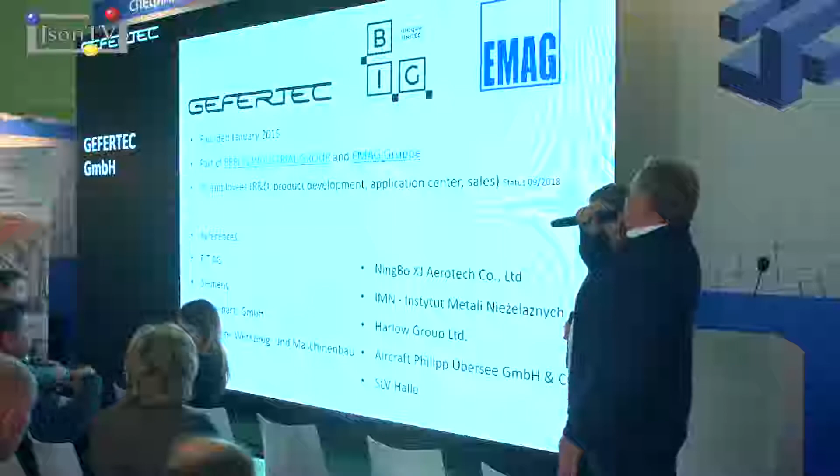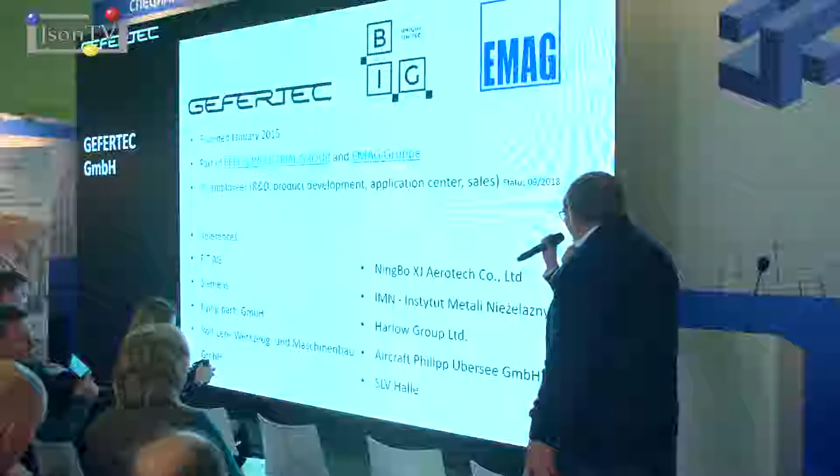Down here you will find some of our clients. It's kind of a widespread target group that we are focusing on. So we are focusing on job shops, aerospace industry, tool makers, institutes, all kinds of different industries.

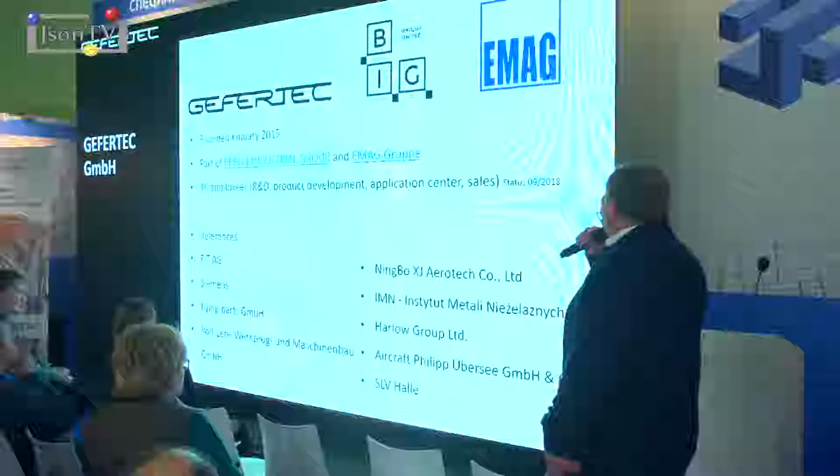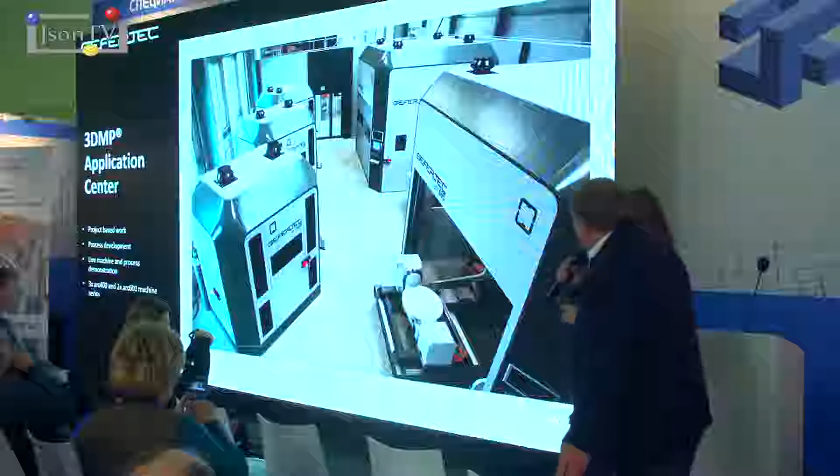Yeah, and here you see our two machine types. We have a small one and a big one, and you will see three small machine, 3 ARC 400 machine type, and 2 ARC 600 machine types.

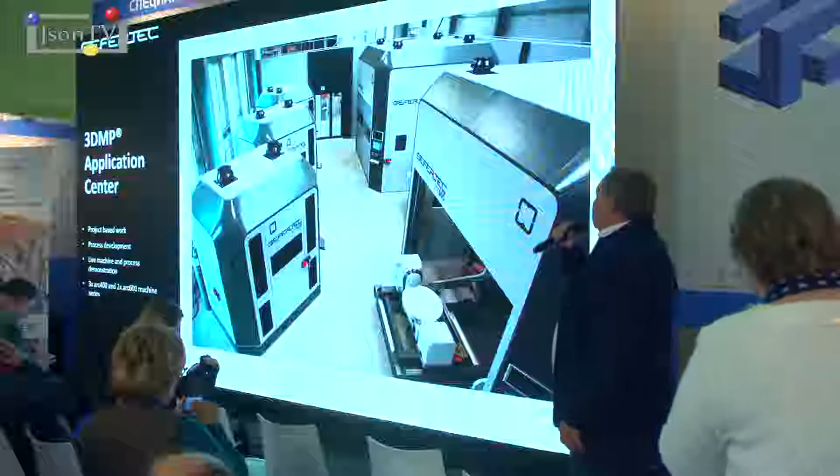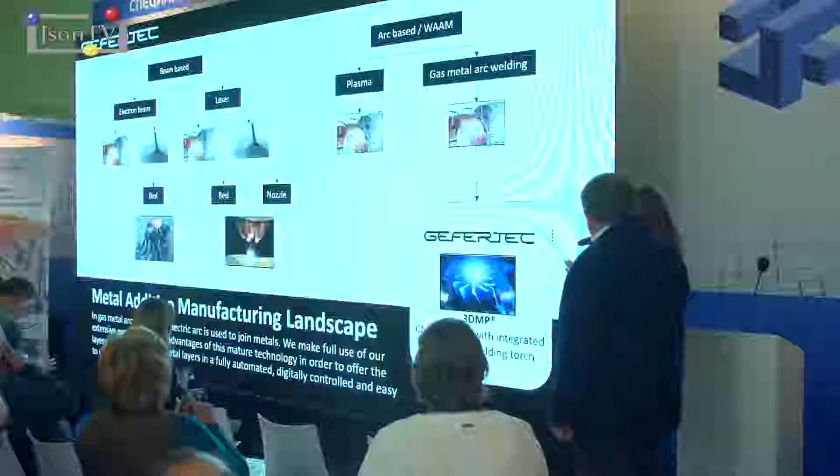All right, and now I will come to the technology itself. So you have seen the machine, and now we are talking about what is happening in this machine. Just to give you an idea, this is a landscape of metal additive manufacturing, and we are located here at the WAAM process. So we are using the WAAM process, which means it's a wire arc additive manufacturing technology.

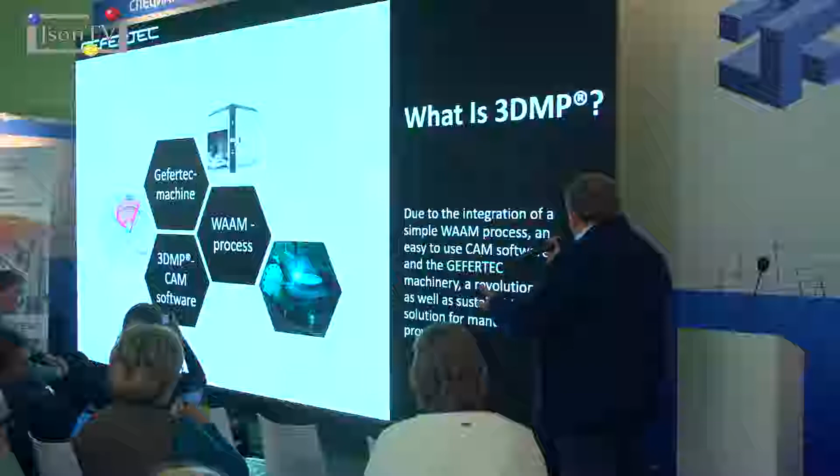But our technology is more than the WAAM process, so we call our technology 3DMP, 3D metal print, and it integrates the WAAM process with the market-ready machine and market-ready CAM software. So the CAM software is our own development, and all those three components, the machine, the process, and the CAM software, that is what 3DMP stands for. It's a package, right? It's an industrial-ready solution.

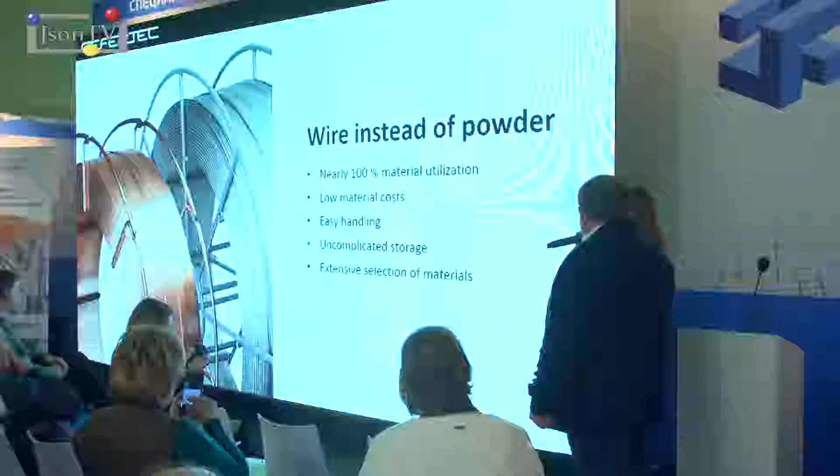And as a basis material, we are using wire, not powder, because it's also cheaper than powder. It's easier to handle. It's easier to store. We are using 100% of the wire, so there's no recycling needed as we have it for the powder technologies. And it's already a market there for this wire, so we are using standard welding wires for our process.

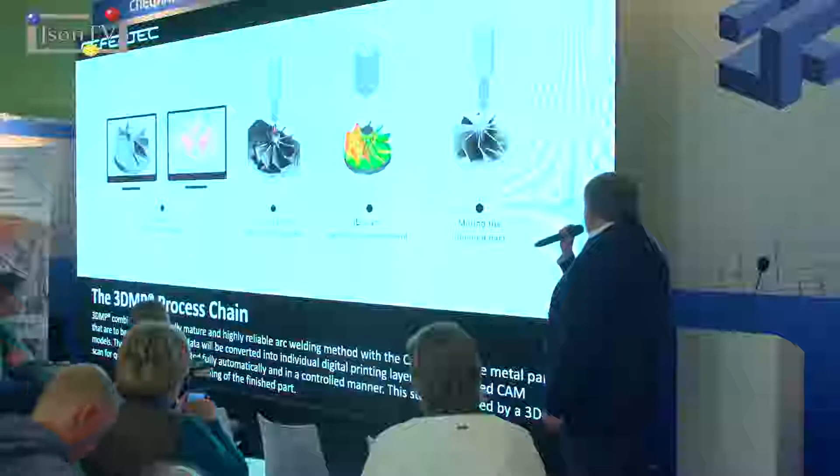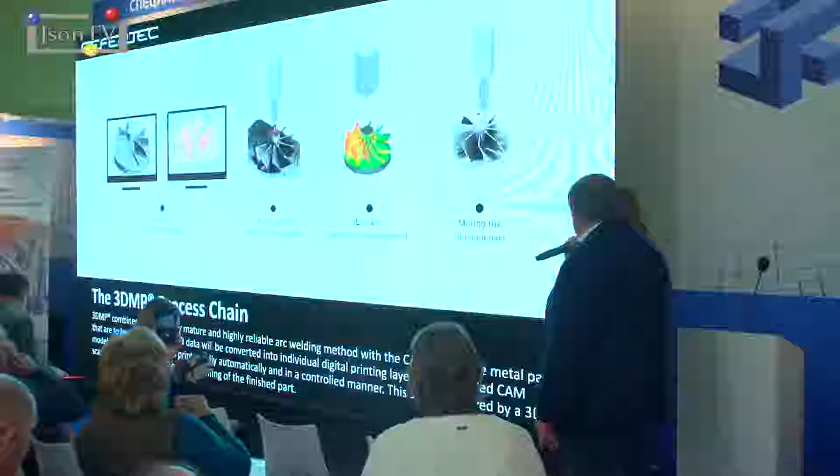Now we're having a look at the process chain of our technology. It looks similar to all other additive manufacturing process chains. So we are starting with a CAD file with a step model of a part. We simplify that, put that simplified model into our CAM software, where the slicing is done, creating the tool paths and getting the NC code out of the CAM software.

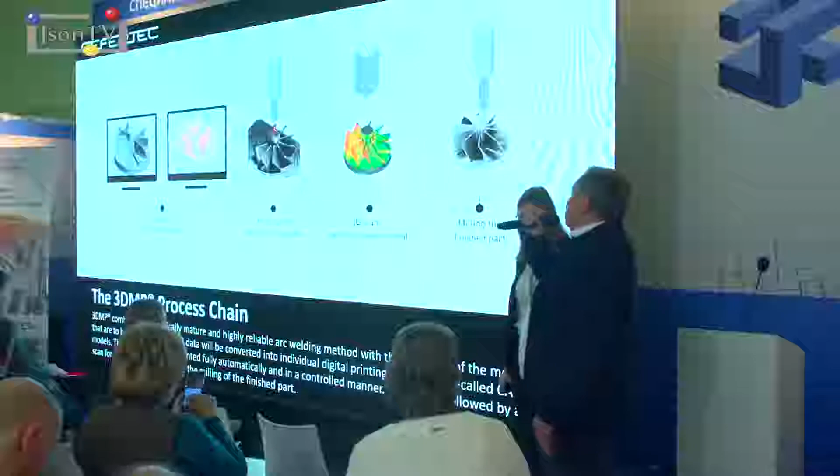Then we take that NC code and put it to the machine, and then we place the substrate plate into the machine and start the printing. The part is printed layer by layer, and then we have the near net shape part coming out of the machine.

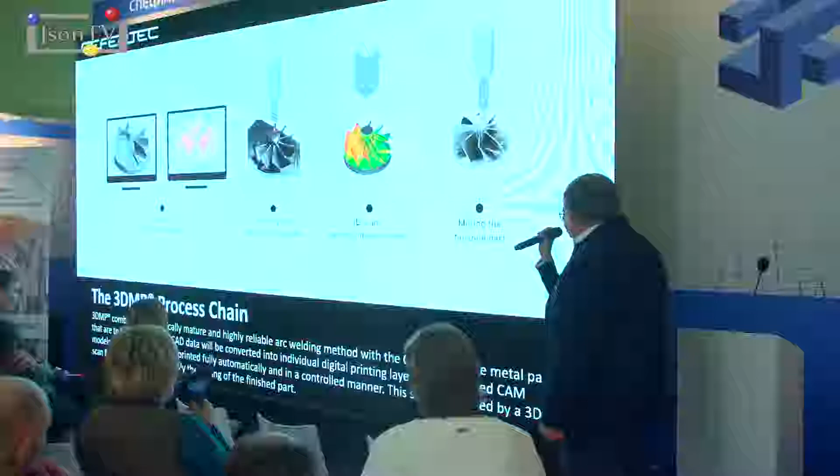After the printing, we are scanning the part because you can see that it's a quite rough surface, so a finishing is needed afterwards. That's why we have to print with an offset, and with the scan we are checking if the offset is alright, so if there's enough material to finish the part.

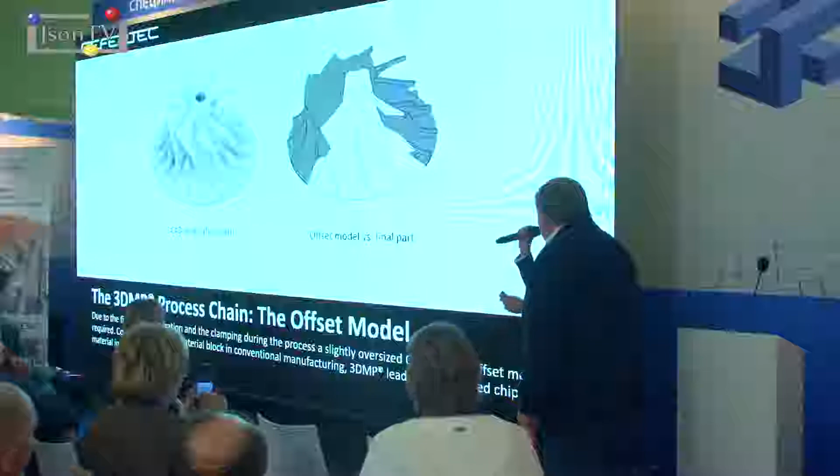Now we will go through this process chain and illustrate it with this impeller here. As I said, we are starting with the CAD model, the final part. We put an offset to this CAD model, as you can see here, generally 1 to 3 millimeters offset that we put onto the final part.

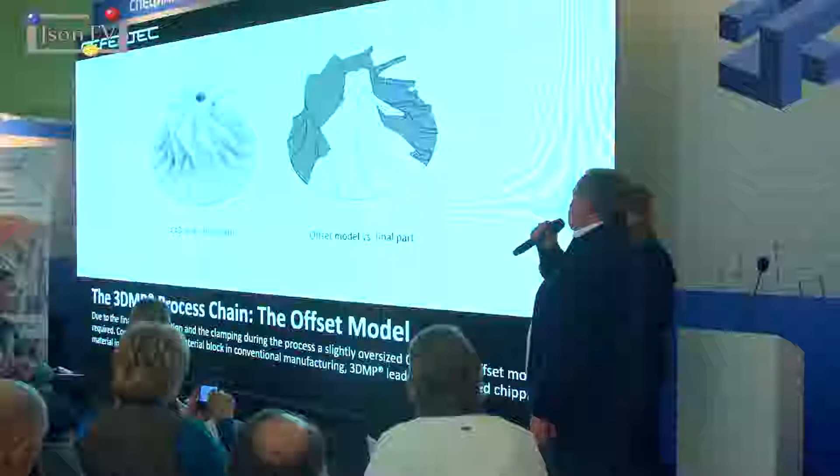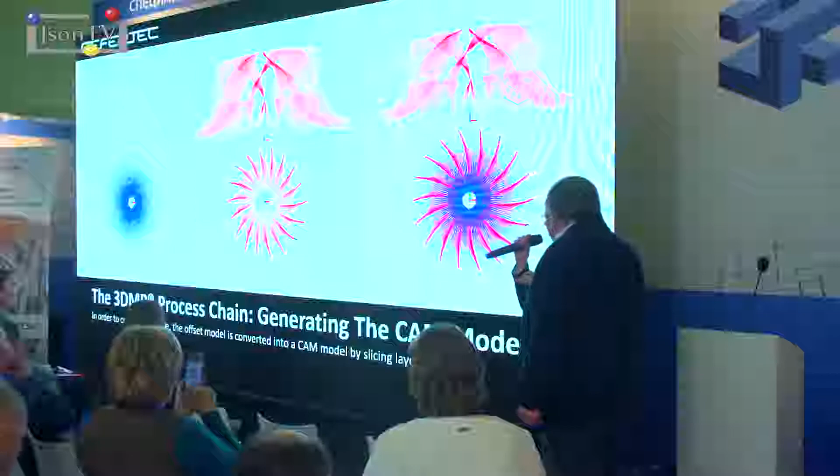And we put this offset model to our CAM software, and I think this explains it quite well that we are always separating the part into different geometries. So with this impeller, we start with the cone and slice the cone, because this is done. This will be printed 3-axis wise, and after that, we are having a look at the blades and slice the blades, because they will be printed 5-axis wise. And then we put those two paths together and get the NC code for this program, for this impeller.

3-axis or 5-axis? The cone is 3-axis. And the impeller itself is 5-axis.

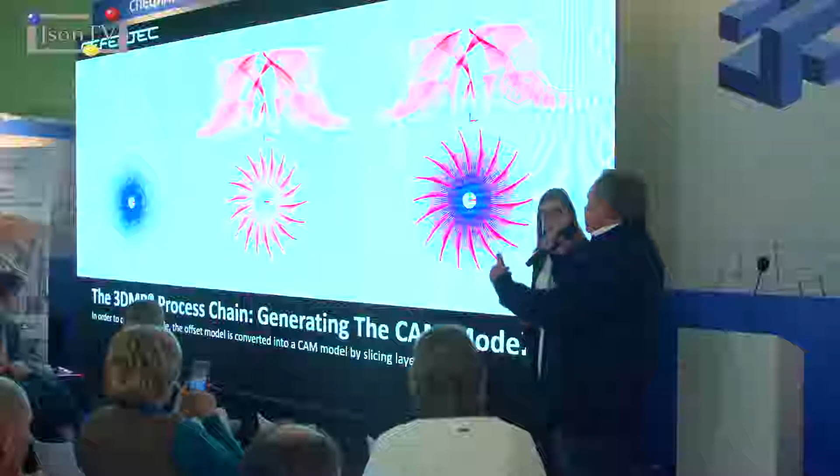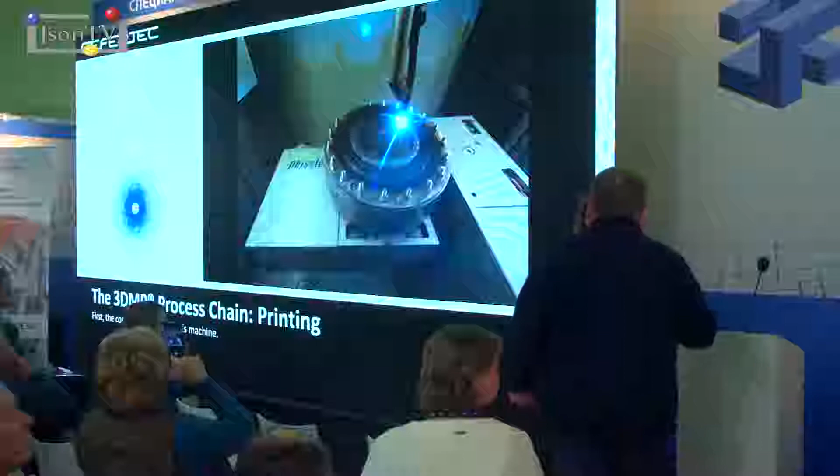Okay, and now we will start the printing. Can you start? It's a video. Where is the video?

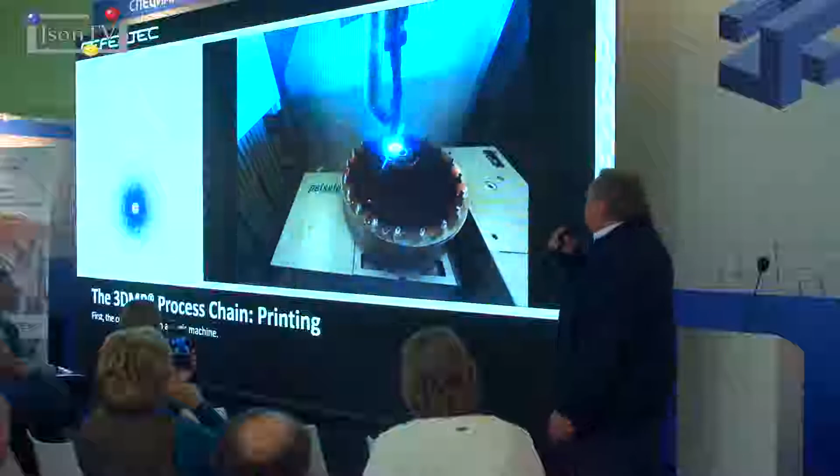So this is first we start with the cone, 3-axis wise. The diameter of this impeller is 400 millimeters, and the height is 250.

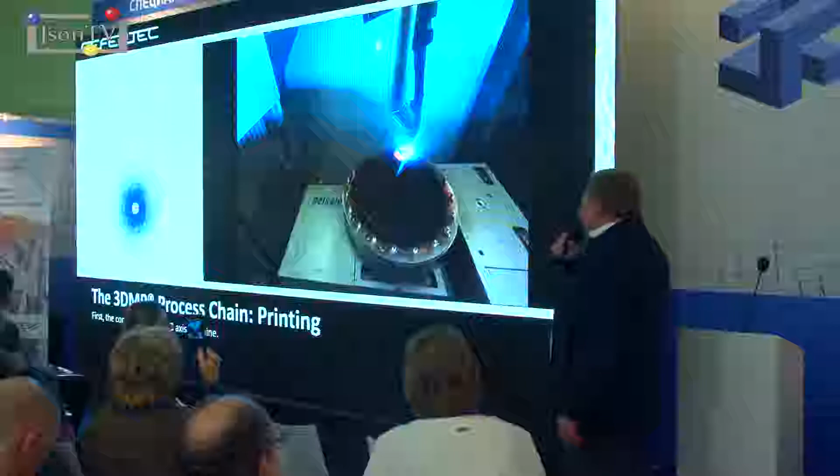And now we are printing the blades onto the cone 5-axis simultaneously. And this is, we are capable of that thanks to our CAM software.

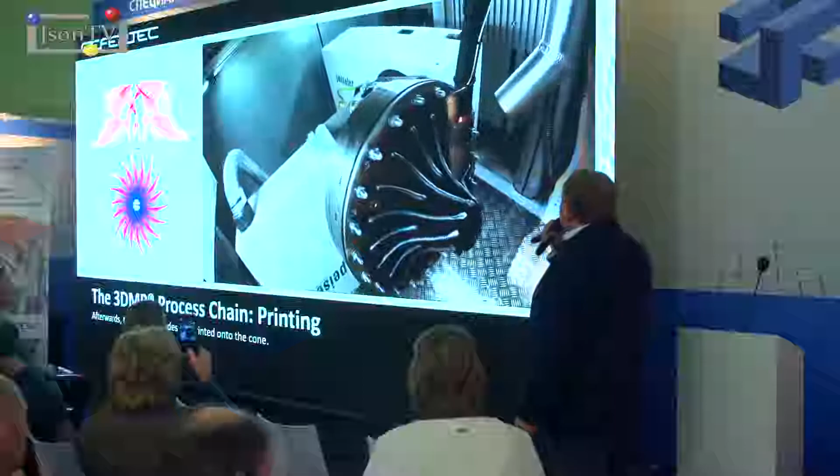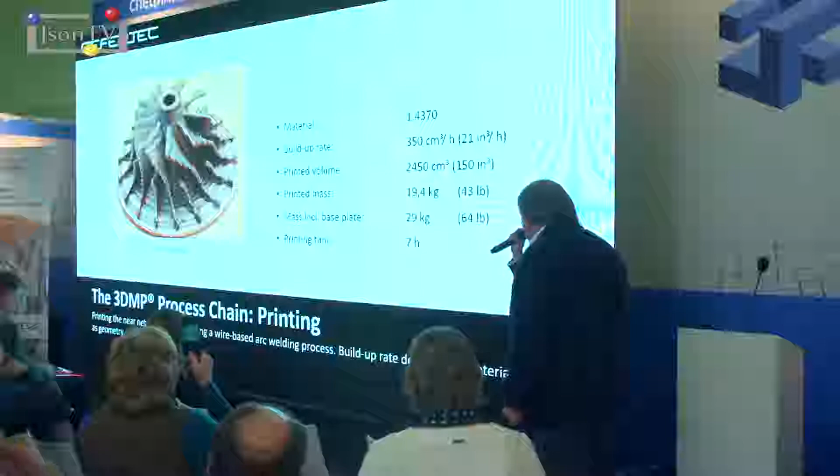Okay, and then we have this beautiful printed impeller. The printing mass is around 20 kilograms of stainless steel, and we were printing that one in 7 hours. But we also have to measure the interpass temperature of the layers, which we do with a pyrometer. When it gets too hot, we have to stop and cool it with pressured air.

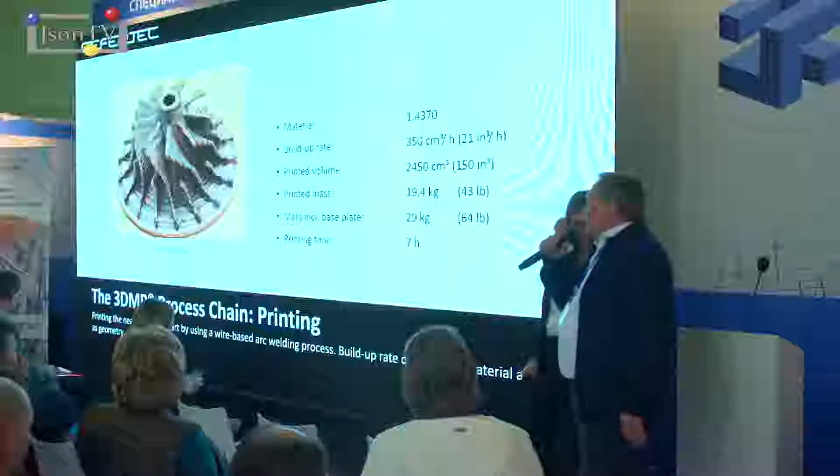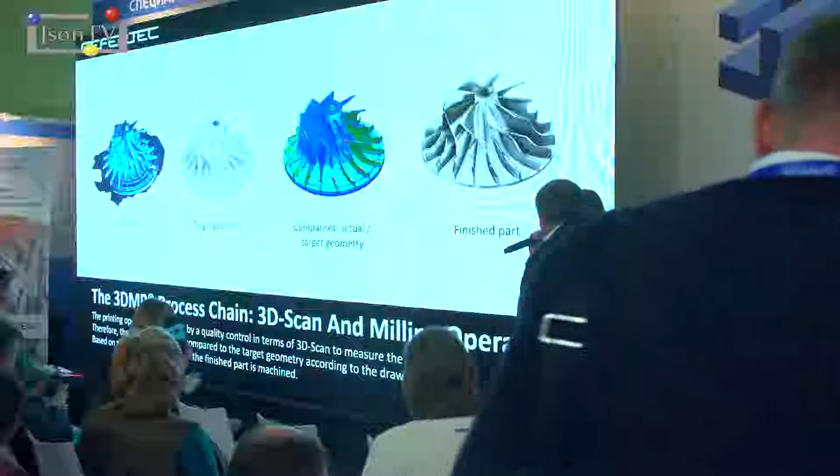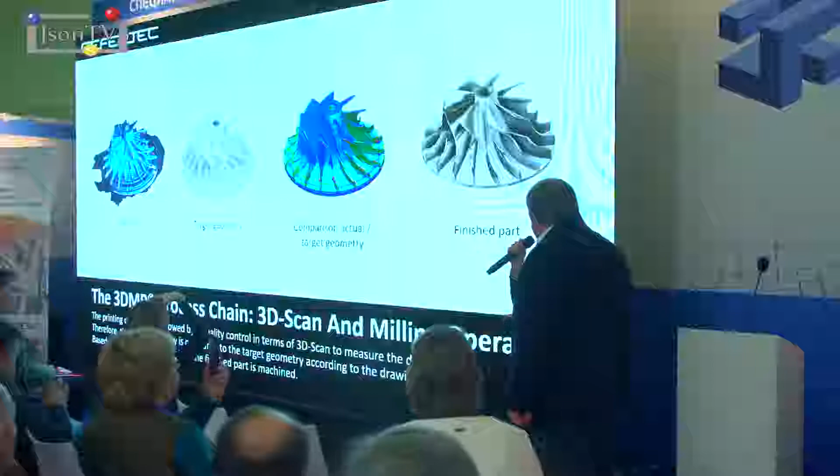Okay, after the printing, we are scanning the part and see if the offset is alright. This is an example of a worn-out impeller, comparing the actual geometry to the target geometry. Those red spots show where we need more material. This is an example of how you can repair worn-out parts; you don't always have to start from the base plate. Red spots stand for places where material is not enough, so you can return the part back to the process.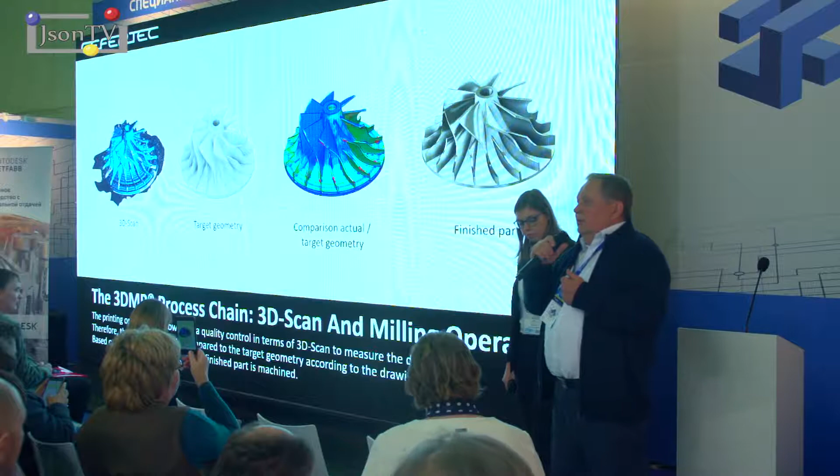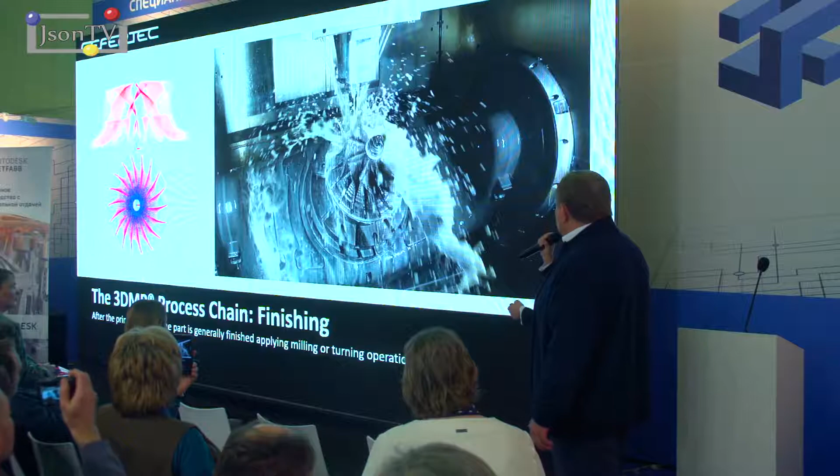Okay, and after we checked if the offset is alright, we give that to partners and the part will be milled and finished. This is a half-finished impeller just for demonstration. On the previous slide was shown the process of milling, and so this is what the finished product looks like when all the work on this item has been completed.

All right, so this was our process chain. Now this shows quite good what we want — to which technologies we have competition. We don't compete with those powder-based technologies; those are totally other applications, totally other parts that they can do. We want to fight against conventional manufacturing, so we can shorten the whole process that is needed in advance of producing the part, with our 3DMP technology.

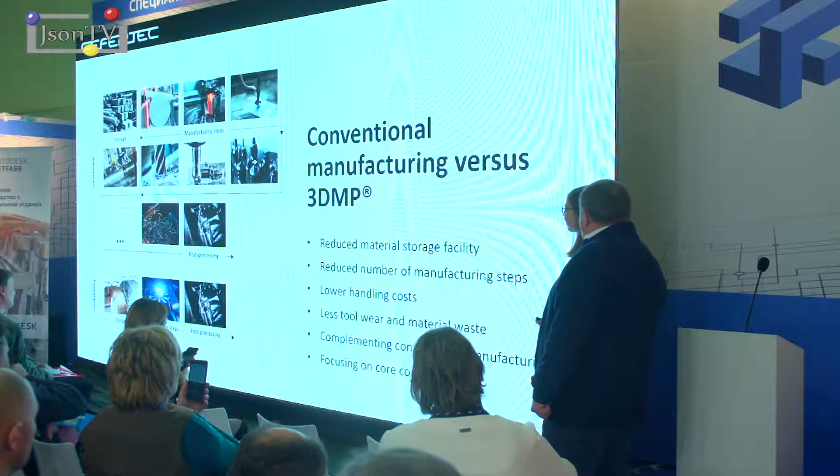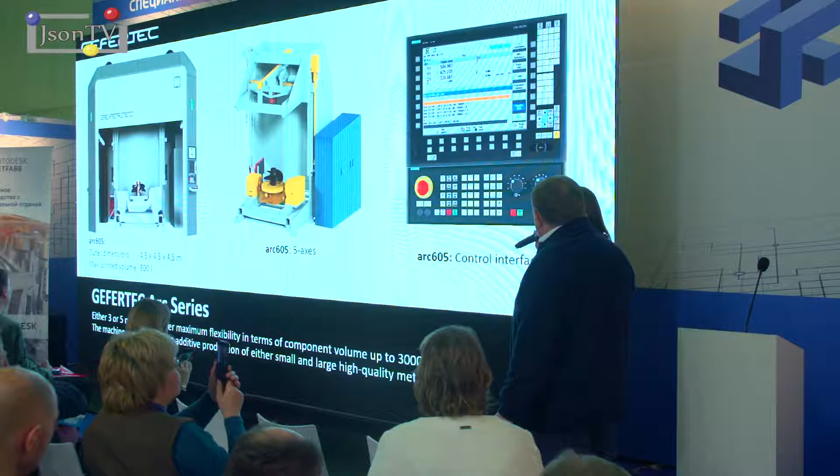Okay, and this is our machine. This is our big 5-axis machine, the ARC 605. It has a tilt table and a Cartesian system. We are using Siemens control, which is well known for most of the customers. It kind of looks like a milling machine, but with a welding torch instead.

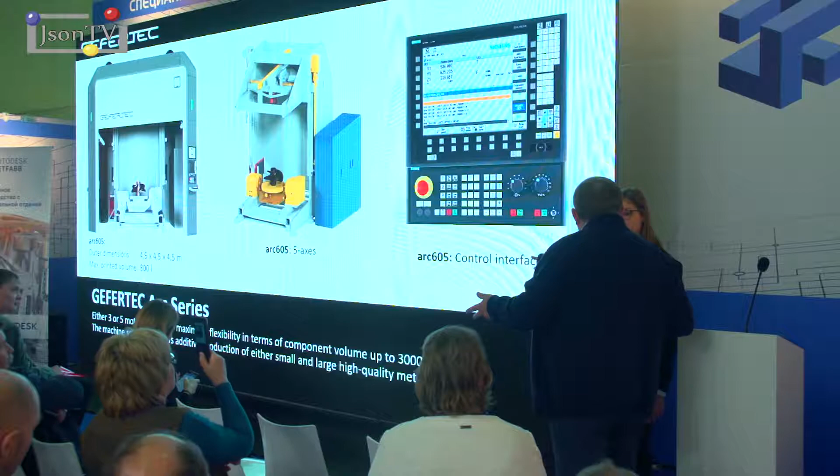And those are our small machines, so that's more for beginners, I would say, and for institutes and research. The machine concept is the same, it's just a smaller build-up volume.

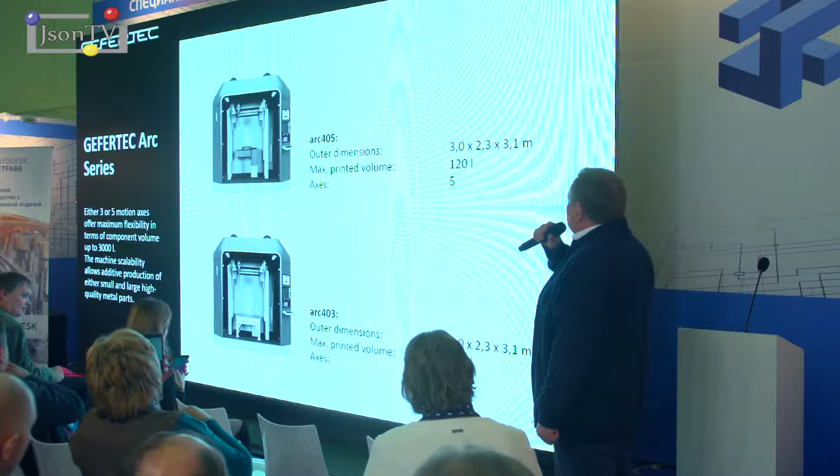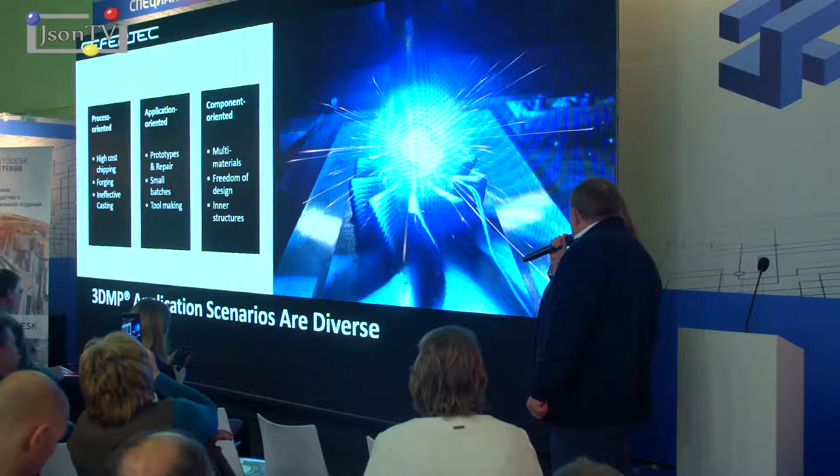Okay, now we are coming to the applications that we can build with our technology. We have 3 main advantages when you're using our technology. The first one is that you're saving money, so you are not wasting so much material, you don't waste so much milling tools. The second advantage is that you're maybe not cheaper, but you're faster, so you're more flexible and you can shorten your lead time.

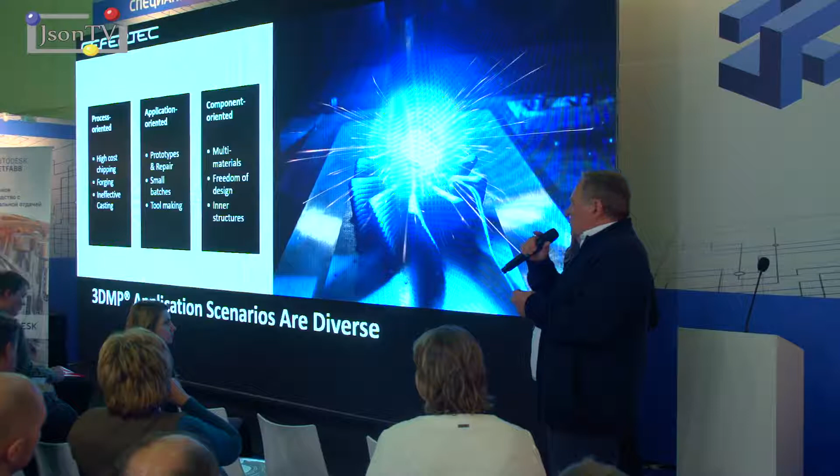And the third advantage would be that you can integrate new functionalities into your parts. So you can mix materials, or you can integrate cooling channels into your parts, and just create geometries that you can't create with conventional manufacturing.

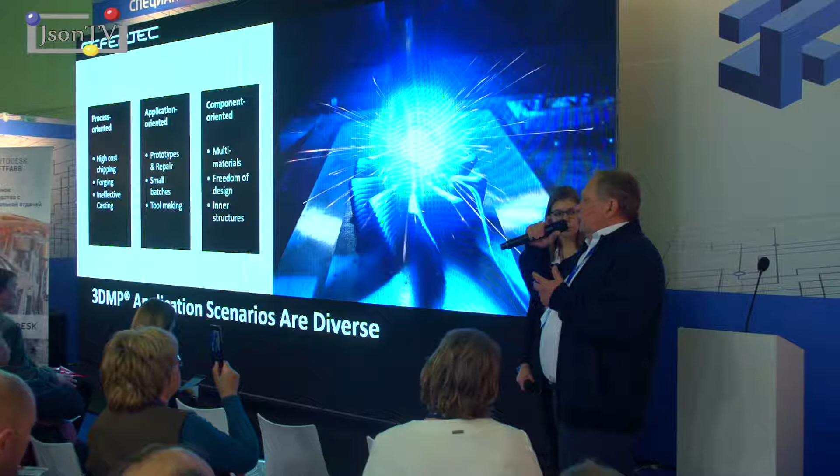Okay, now we'll go through some examples. This is an example for the cost-saving advantage. Conventionally, you are milling this bearing block out of this huge block of raw material, so you have 80% chips. When you compare it to the printing, you print the near-net shape part. Of course, you have to mill it afterwards, but it's only 28% chips, and so you save around 50% of production cost for this part.

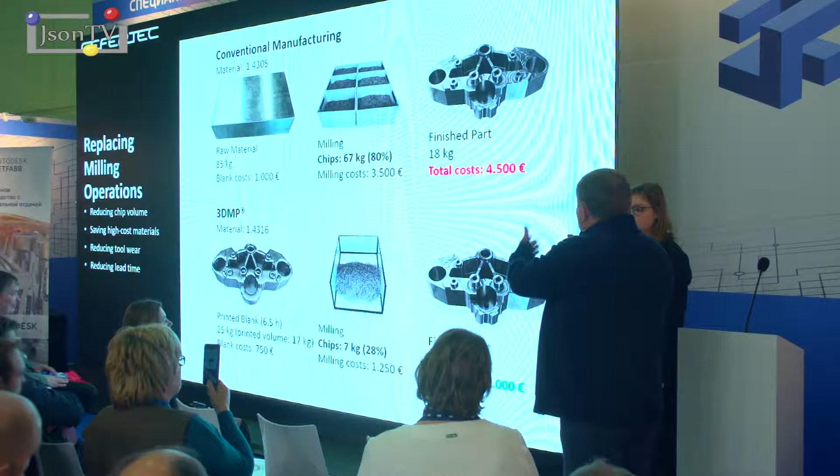Okay, this is an example for stainless steel. The more expensive the material gets, the more sense it makes to print the part, for example, for titanium. Titanium is a really expensive material. This bracket is normally also made out of a block, and when you see that only 2 kilograms are left from the 14 kilograms, that hurts really much.

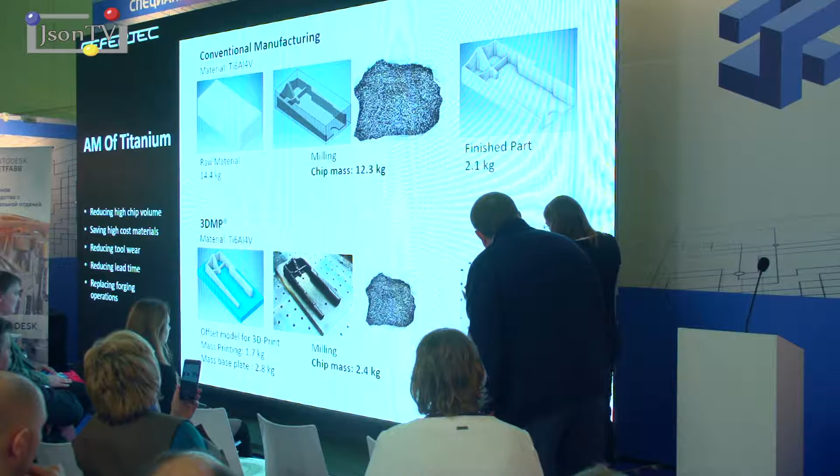And with this example, it's also quite nice to show that we are always trying to integrate the base plate that we are printing on into the geometry of the final part. So we only print those structures, we don't print the plate — it doesn't make sense to print that. So you connect them, we are welding on it. Yeah, so we are welding on the plate, but the base plate is a part of the final part. It's also made of titanium.

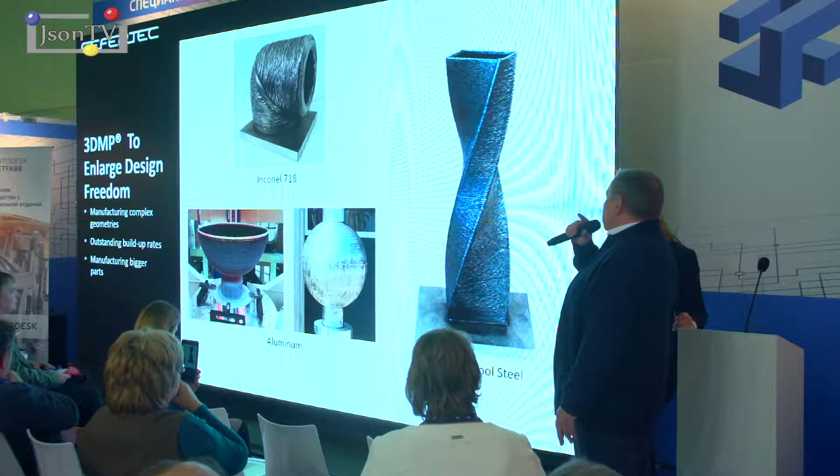As a third advantage of our technology, I mentioned that you can mix materials. So you can mix, for example, or coat a stainless steel with a copper base, or mix different steels. This is quite interesting for the tool making industry.

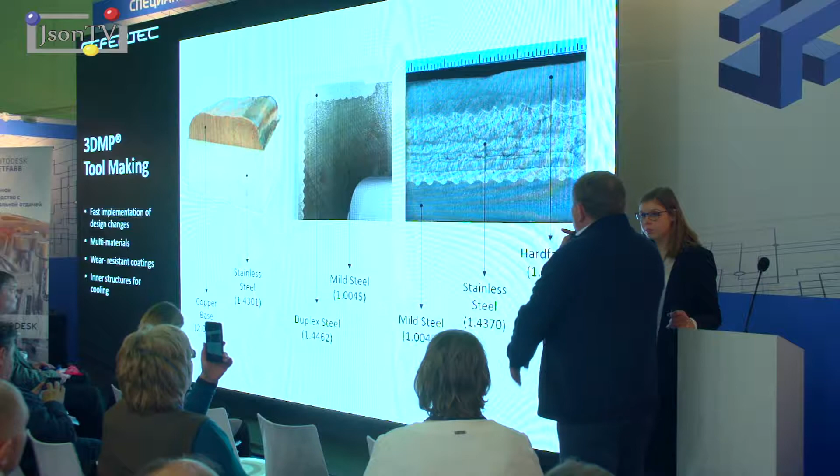Also quite interesting for tool makers is that you can integrate cooling channels into your part. We can't do round cooling channels, as you can see in figure 1. But the geometry of our cooling channels looks like in figures 2 and 3, more triangle or rectangle shaped. That is possible, and for tool makers it's quite nice because the surface within the cooling channel is quite rough, so the surface is bigger and the cooling gets better.

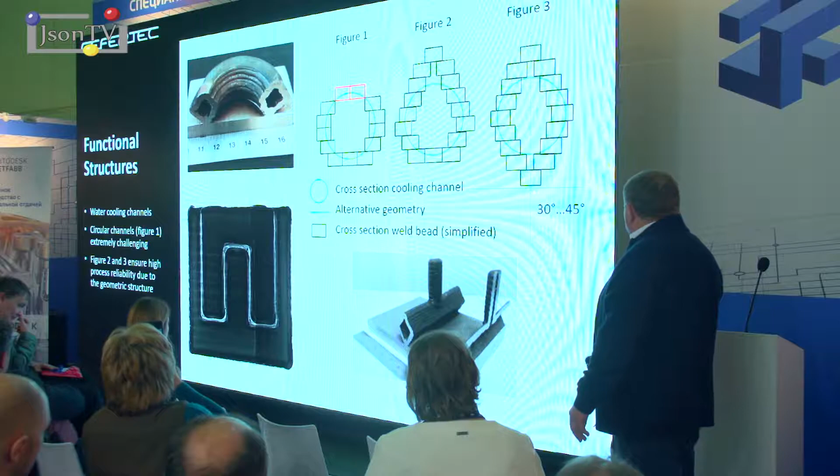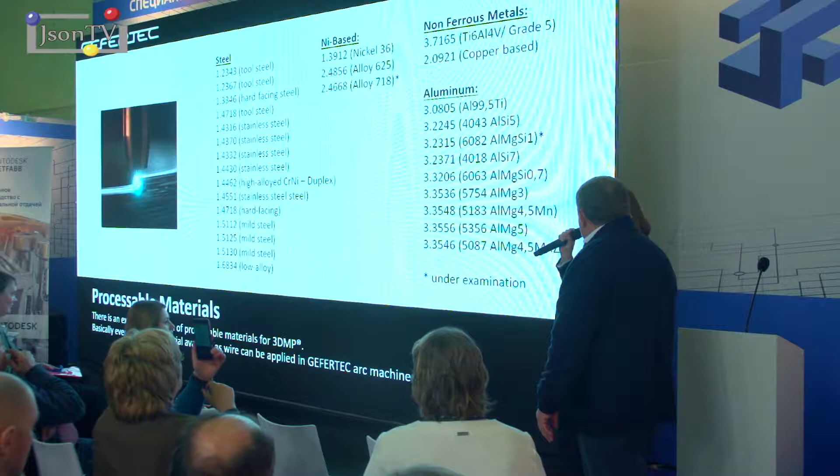Now we're coming to the materials that you can process with our technology. This is a rough overview. You can print all kinds of steel, stainless steel, tool work steel, nickel-based alloys like Inconel, titanium, as already mentioned, and a couple of aluminum alloys. But that's not all of the materials. As I said, we can use every welding wire which is available on the market, of course with sufficient quality, but you don't need an extra welding wire for our technology, it's standard.

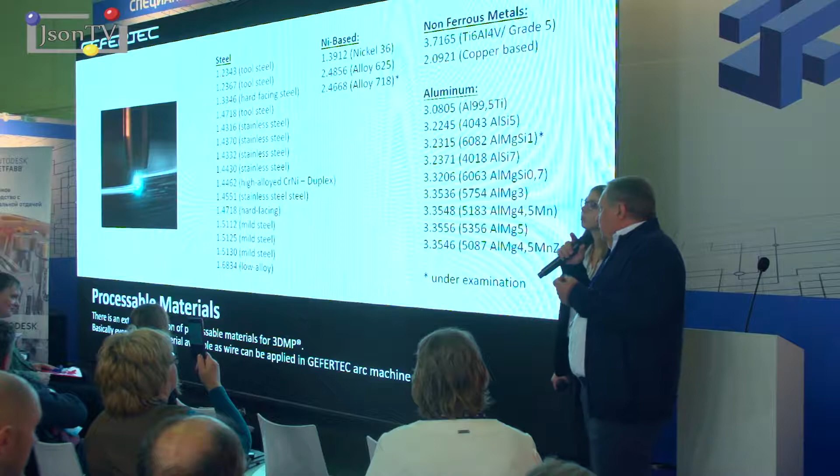Okay, and this is it. Just to sum up, our 3DMP technology is for big metal parts, as you can see. The parts, of course, have to be finished afterwards, but you're really fast and flexible to print whatever shape you like and get, in a really fast way, a near net shape part. You don't need so many tools anymore, you don't waste so much material anymore, and you are more flexible in the design of parts and can generate more complex parts.